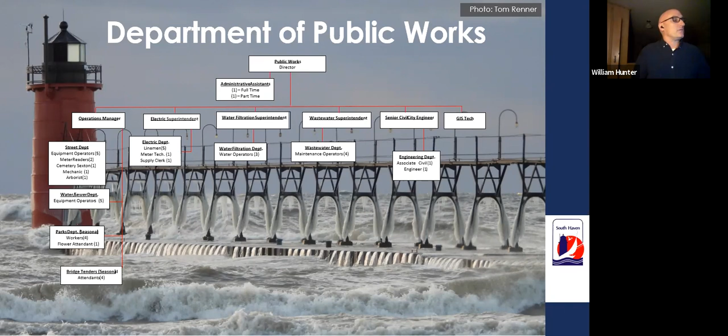Let's go on to the next slide. I'll start with the electric department. We have over 40 square miles of area that we cover and 8,500 customers. We have 150 miles of overhead electric lines and 10 miles of underground lines that we maintain. We have an operating budget of 19.5 million, and currently we're working with GRP, the engineer we've used ever since I've been here for any electrical line designs with the city.

We're currently asking them to start the design process for a new substation on 12th Street, so we'll have 3 substations in the future. That substation alone will cost about $5.5 million.

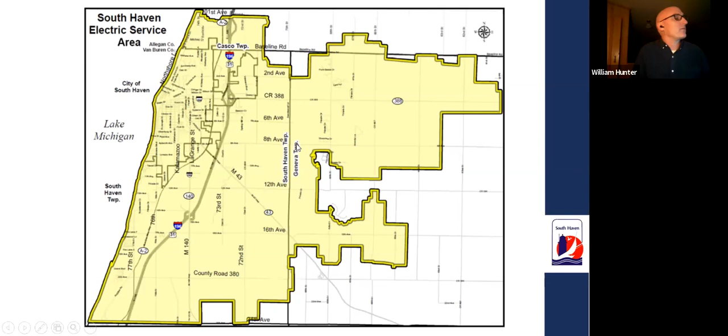This is actually our service area. It's quite large, with two townships in the city, so it's a large area that we cover.

It also shows pictures of upgrading a line on 77th and removal of old poles. We've been doing that in-house with the new supervisor, Joe Miller, taking over; he's been very proactive. You'll see dual poles during a lot of upgrades—they're still there, and we try to work with Frontier and Comcast to get those removed, but that's a challenge. So Joe sent staff out, and for any easy transfers we've just been removing them ourselves because it's been a challenge to get Frontier and Comcast to take care of those.

Another picture on the bottom shows hot stick cleaning and testing. All of our equipment—excavators, bucket trucks—all gets tested. Sometimes it's smaller stuff we test with the hot stick, but for the boom trucks we have companies come in and certify them.

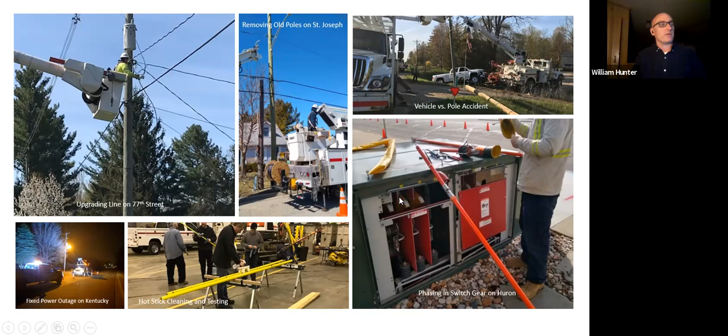We just switched over. Another one we have is GIS, Geographic Information System. It's a department, but there's one guy, Ryan Bosher. We are lucky to have Ryan Bosher as an employee in the city of South Haven. He's not just a guy that makes maps, which you can see right here.

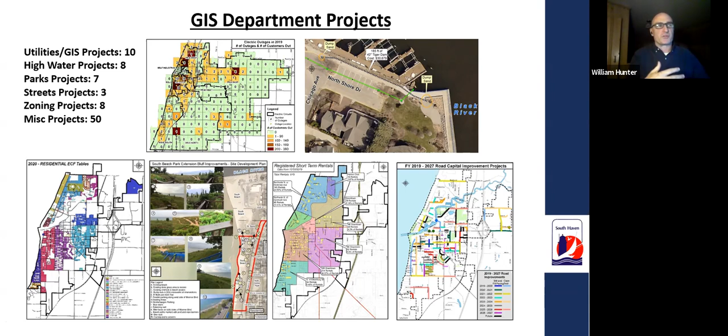You can see from the amount of maps he does, and this will show per quarter, but he also is very good in planning. He helps out in that. So I also call him our researcher. If you need something researched, Ryan's the guy.

So these are just some of the maps. A lot of them you've probably seen. You've been in a meeting before, if you've seen a map, Ryan's done it. A map says 1,000 words sometimes when you're trying to explain something in a memo, and then you put a map up and people go, ah, okay, that makes sense now.

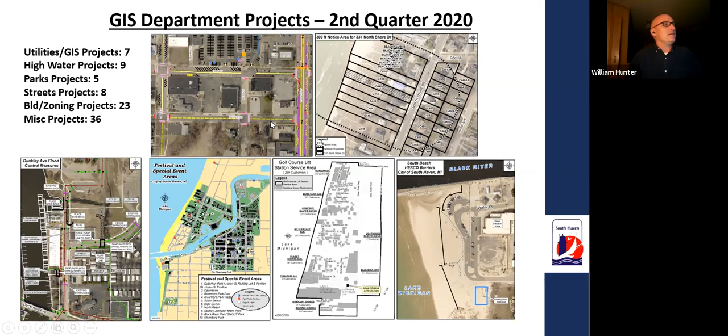Ryan does this. These are just some of the projects he worked on in the second quarter. I'm not going to go over every one of them, but street projects, planning and zoning, miscellaneous projects, parks, high water, to name a few, utilities, GIS projects.

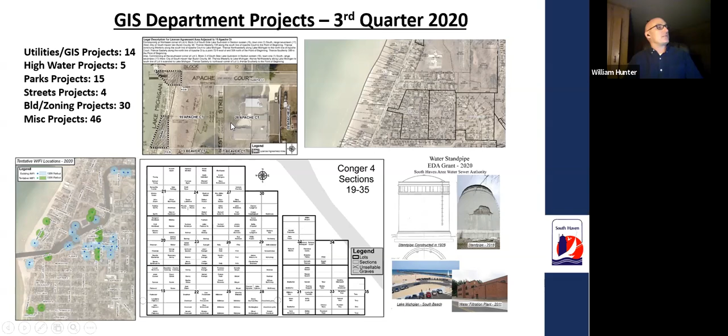Again, like I said, more maps. Send Ryan out to take pictures. He's the guy, for example, right over there in the lower right-hand corner that shows the concrete standpipe in its current condition. Plus over there in your lower left, you'll see the Wi-Fi, and then up to the top you'll see Apache Court. So again, these are all the projects he does.

He's done this too, for example: customers will come in and say I need a location on maybe my utilities or other information on their property. Ryan can print it out or find it. We have people come in and he helps them out. Like I said, he's a very good asset to the city. He's not just a map guy.

All that inventory is what Ryan can come up with in a matter of minutes. So when I put all this together, Ryan's able to pull it together and help out.

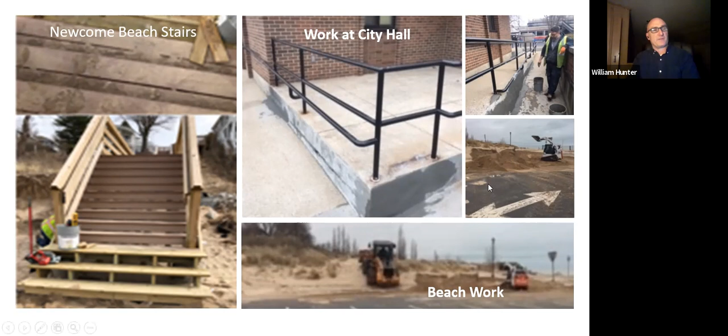Here are some pictures of some of the stuff the guys have done over the years. The staff worked on the Newcome Beach stairs, for example. When we moved those, we had to extend the steps on the bottom. For the handicap stairs up in front of City Hall, we had a blowout on the side, so staff went through and mudded the side of it just to preserve it and protect what we have existing there. This also shows staff cleaning the south beach on the bottom and the beach work they do.

These Bascule Bridges are expensive to maintain. Just the inspections alone, our last detailed inspection, which is done about every 5 years, cost $123,000. The biannual inspections outside of that run about $30,000. So it's an expensive bridge to maintain.

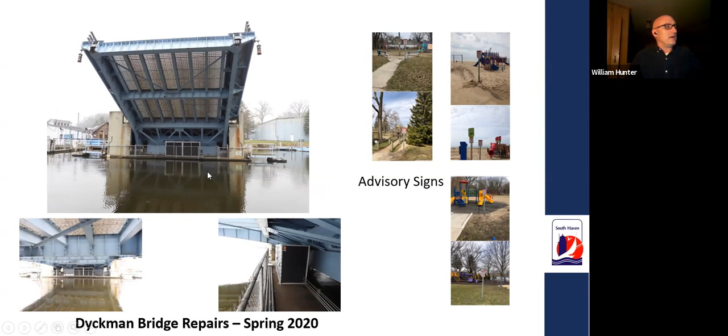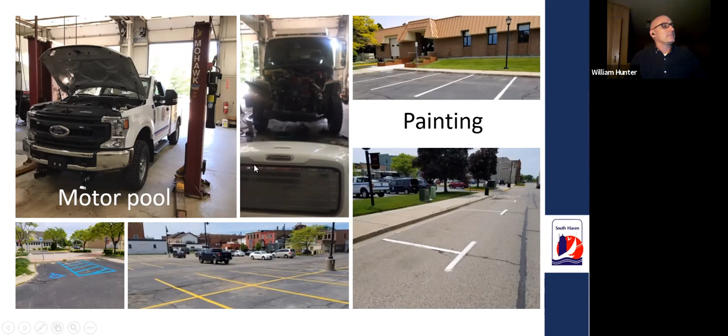Throughout the city, we're trying to concentrate in the future on not doing so much centerline marking. It might be something we look at in coming budgets—maybe contracting out the centerline and focusing more on our pedestrian crossings and parking lots, because due to not having enough manpower, those don't get the attention they deserve.

The two pictures to your right are the signs put up at the splash pad. We have our own sign shop. Prior to me getting here, we had to get our signs from a company and waited like 2-3 months to get them. With a machine we purchased for about $12,000, we're able to do our own vinyl signs in-house. We can have things plugged up or put out, and we can do them really quickly and within regulation—it's all in an MUTCD inventory of signs, so everything is put in according to the manual.

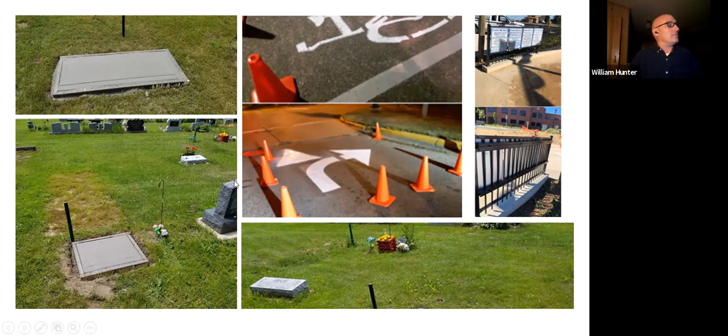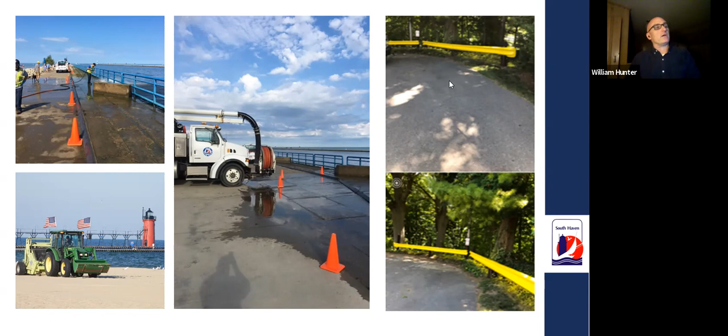This shows, to your lower left, beach cleaning. We're out there as soon as the beaches are open, at least 3 or 4 days a week just cleaning beaches. And then it shows a new guardrail that staff installed.

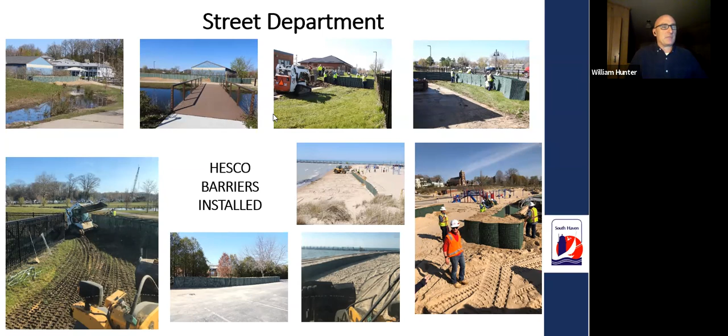I've received quite a few calls from other municipalities looking at this same thing, HESCO barriers—at least 2 or 3 calls a week asking how we did it, what the expense was, how easy it was, and people come and take pictures. So I think staff did a great job on that.

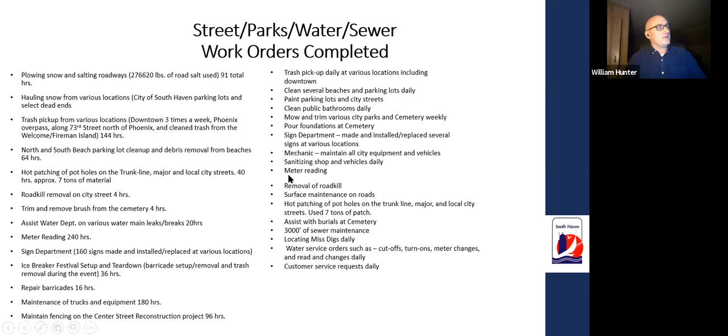Here are some of the work orders that staff has put together, just some of the stuff they've done. For example, you see 3,000 feet of sewer line jetted, and it shows the number of pounds of salt we lay each year. So, some of the work orders.

Over the next 20 years, we're going to be replacing $15.9 million worth of lead services that we'll have to budget for. Going back about 3 years now, the state of Michigan amended the Safe Drinking Water Act, and the definition of a lead service now is anything that has lead or was connected to lead. Galvanized services are now considered lead services, so we have to come up with a plan. That'll be about $15.9 million.

We have about $6.9 million over the next 7 years for the capital plan, just to replace the concrete standpipe. That services about 11,305 residential, business, and school customers. We have approximately $41 million over the next 28 years, according to our asset management plan, for work that needs to be done in our system.

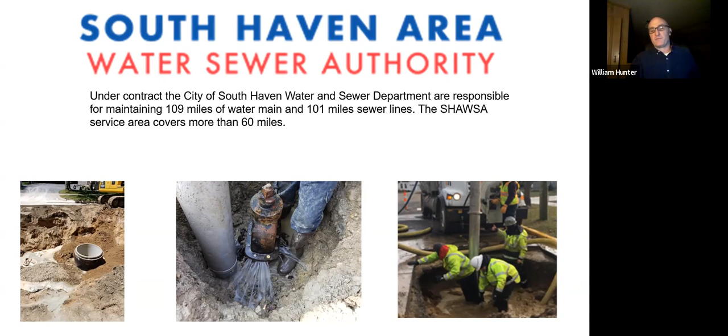We are going to be raising rates this year, unfortunately. Water rates will go up 6.5% effective January 1, 2021, and another 6.5% effective July 1, 2021. Sewer rates will go up 9.9% effective July 1, 2021, and 9% effective July 1, 2022. This is our service area for water and sewer.

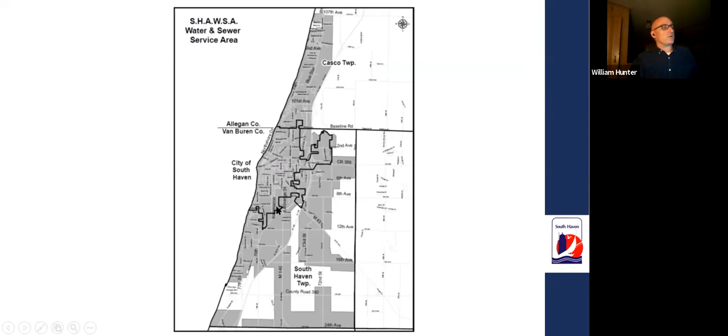You've got Casco to the north, South Haven Township, and the city. Just for example, that $15.9 million for lead service replacement is all within the city, because of course we've got the oldest section of distribution there.

Okay, moving on, we're now at the wastewater treatment plant. The value of that asset itself, with all the lift stations, is $23,316,468. That does not include the collection pipes themselves. Our current average at the wastewater plant is 1.39 million gallons, and our design capacity is 2.19 million.

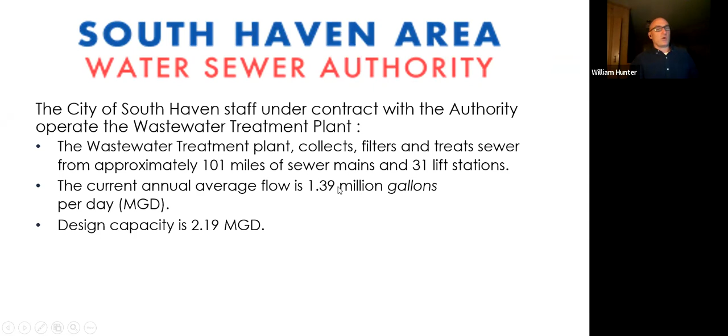Here's a picture of the wastewater plant, and on the side you see two pie graphs, and you'll see a couple more as we go. The wastewater treatment plant uses an asset management plan called Cartegraph, where we track everything, so we're able to dial down to exactly what we're spending money on. It's a great asset management plan that we implemented about 2 years ago, and it's been very helpful.

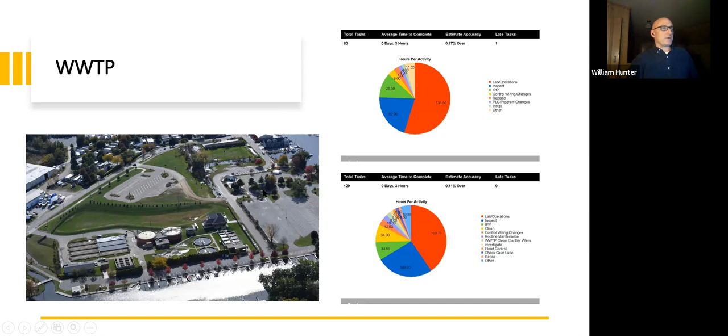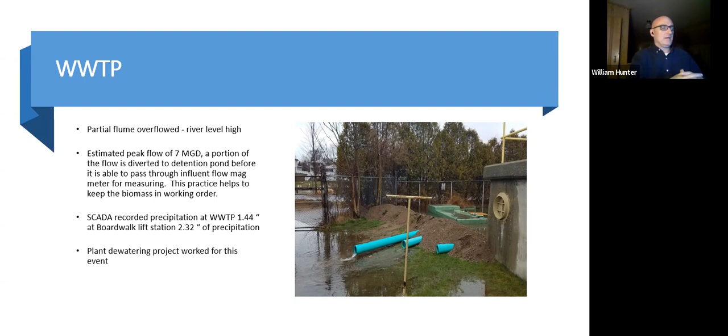This is what we've been experiencing. You can see that gravel berm over there, plus those pipes. We had to buy two pump systems because the water level was getting so high. The wastewater treatment plant is all gravity, so once everything comes to the grit building, it flows by gravity. If you have enough feet of head of water against the discharge pipe, it slows the system down. With the flooding and increased water elevation, we had to come up with a pump system—one to take care of the water in the area, and the other to discharge from the flume out. That's been working great. We're going to maintain these pipes as they are now, but we're looking at future quick-disconnect areas on the plant so the same pumps can just be hooked up when high water happens again.

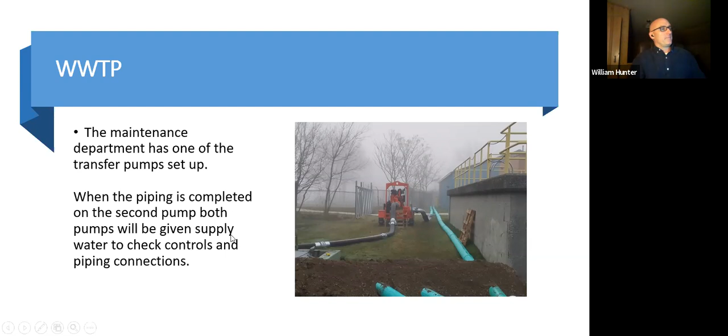Everybody's like, yay, but then you go to the wastewater plant and you've got the smell coming at you. A lot of times I can tell by the look on their face when I'm giving them a tour how long the tour is going to be, just by the first time they get in the building. So I know when I have to speed up the tour or slow it down.

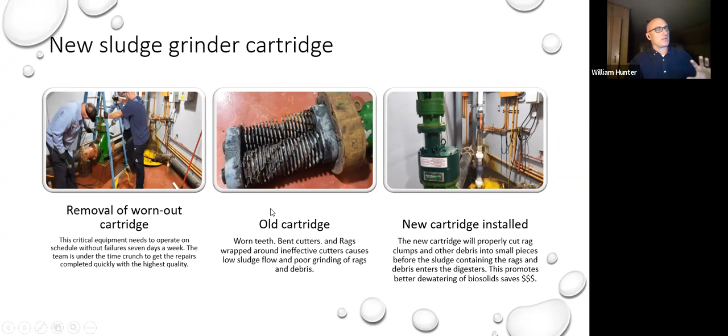This just goes to show some of the work, and all of it is done internally by staff. We might not rebuild the pumps entirely, but we can pull them, and sometimes we can actually do minor rebuilds. Sometimes you just can't get around it.

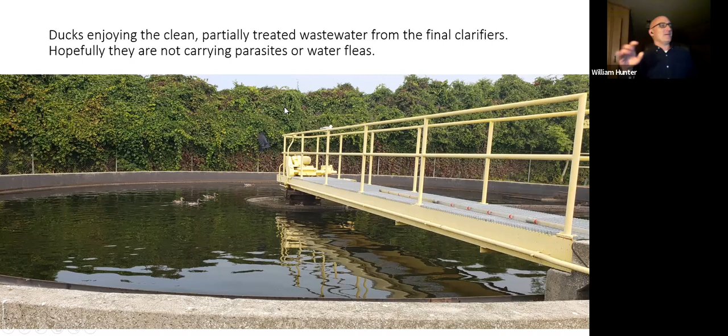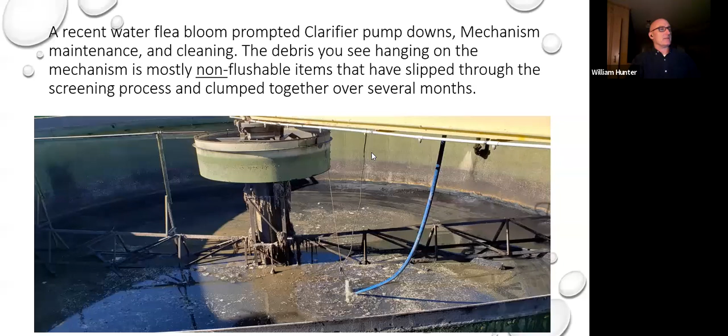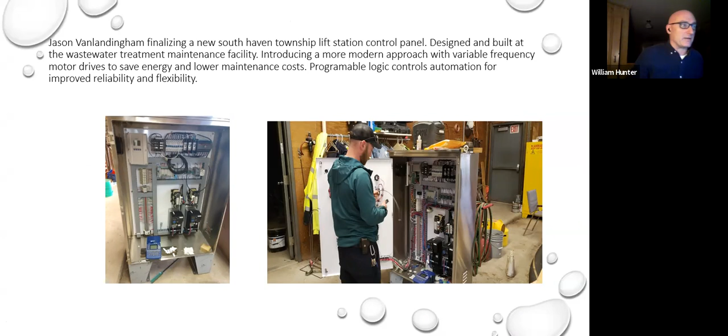This actually shows Jason, we have Jason Vanlandingham. He's a great asset to have on board. He's built quite a few of our controls on our lift stations and has done a lot of program PLC automation on them. So that's Jason actually doing some wiring right there.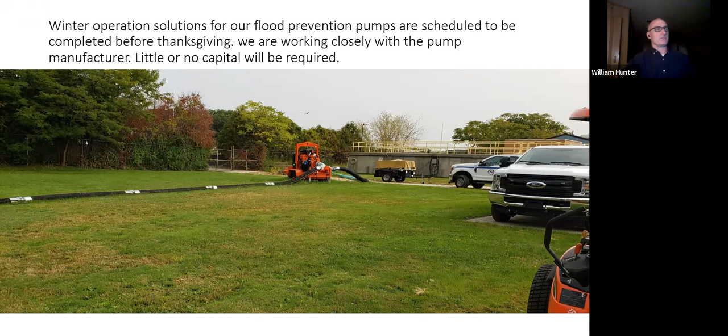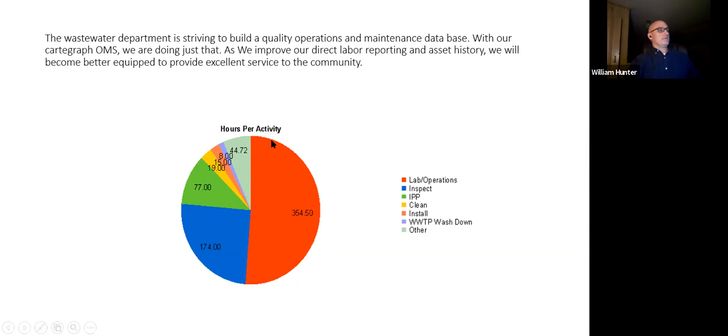So one of the things we have in our 28-year plan is to install a redundant intake, not only redundant but to increase our capacity. Think of it, right now that water plant only has one intake, so it's a vulnerability. We do get it inspected and televised, and Richie does a great job, but you don't drill through it, nor do you know the integrity of the pipe itself. So that's why you need to look at things like that, plus capacity.

Firm capacity of the plant, which is rated at the intake level, is 5.4 MGD. We service 11,305 customers within the Shawsa area.

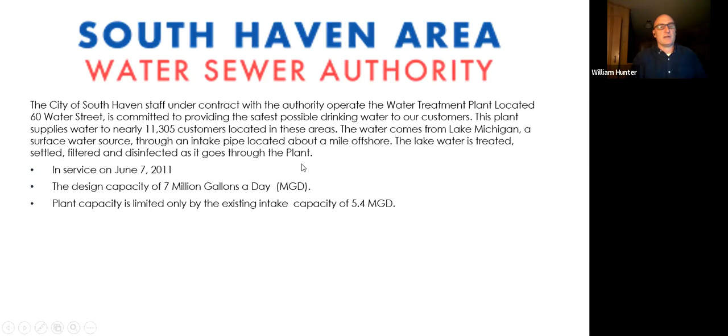We take these tests once a week. Richie sends a guy out and he takes all these samples. We run them back to the lab, and we do what's called the presence-absence test, where we take that sample and add a reagent to it, and if it changes color, then we know that there's coliform in there. Then we'll take it to another step where we plant it in brilliant green, then we plant it back in lauryl tryptose.

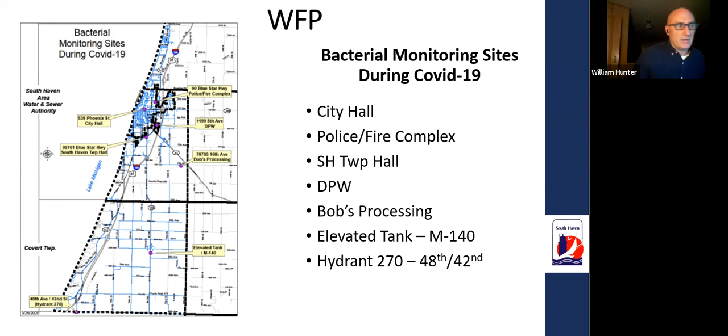We also do heterotrophic plate counts here, and some of these other sites we actually use for some of our other monthly or quarterly samples for haloacetic acids and trihalomethanes.

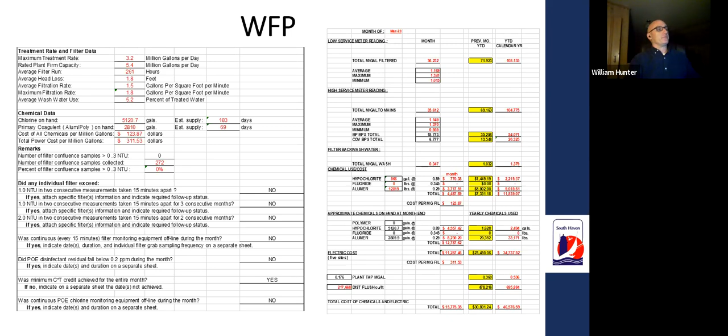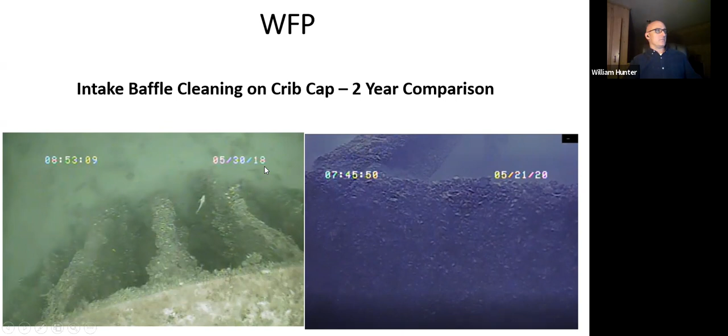Plus, and I probably had said this before to City Council, it takes a road that's a PASER rating of a 5 and brings it back up to a 7 or an 8. So we're taking that curve and extending it out.

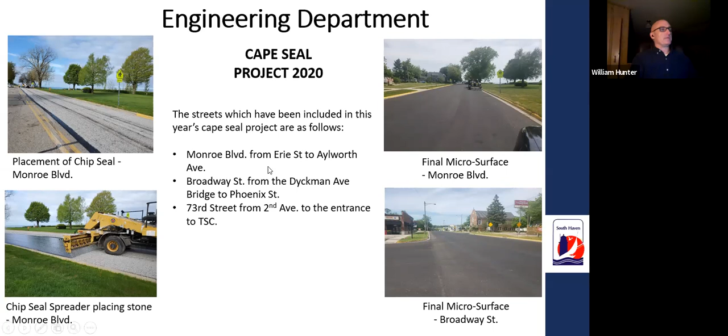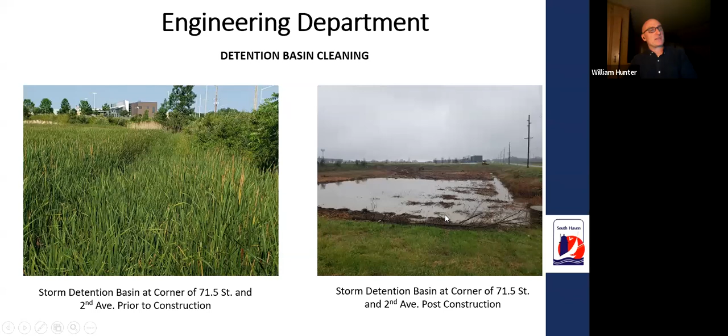Detention ponds - we had a detention pond over at the industrial area that we cleaned, which had never been cleaned before. You can see the before, with all the vegetation, the Phragmites. Then the other side, we had that all treated and cleaned out, so we brought it back to capacity. We had some other ditches too that run just to the south. Spencer Manufacturing hooks onto one, and a couple other companies in that area, but we had to clean those out and bring them back to the original capacity, plus at the DPW building as well.

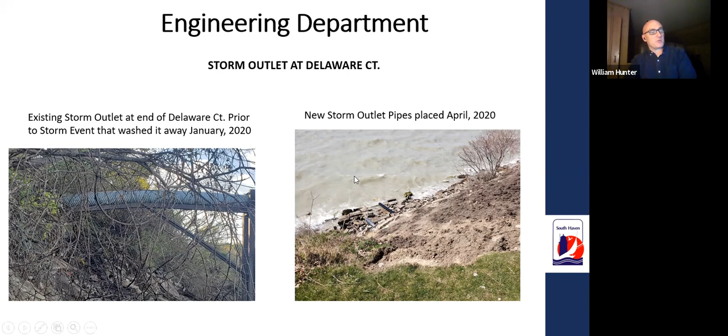Here actually shows the storm outlet replacement at Delaware Court. This was a $74,505 project. You see the before and the after. We may have others pop up due to the high water, but this is the one that did at the time.

Indiana street sidewalk repair - the next couple of slides will just be going over some of the sidewalks we've done. We budget each year $200,000. We take about 100,000 out of 101,446, and another 100,000 out of the street fund, and we do sidewalk work.

This was one that we did in Indiana. Looks like we replaced 286 linear feet at $40,000.

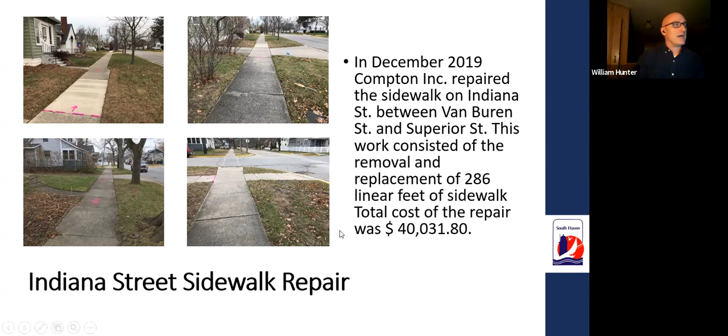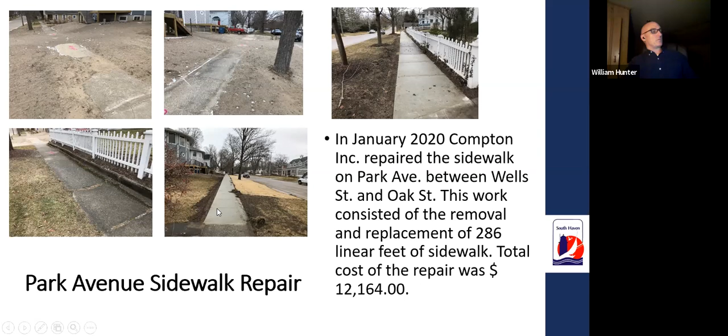And here's another one on Park Avenue, 286 feet at about $12,164. You can see that before, that's what we were dealing with, that upper right - you can see those sidewalk sections just missing. And then when we're done, that's what we have.

Another one over by the washout we had over by the river, in addition to Superior and Water Street. So we have, looks like approximately 20,000 spent on that, $20,908.

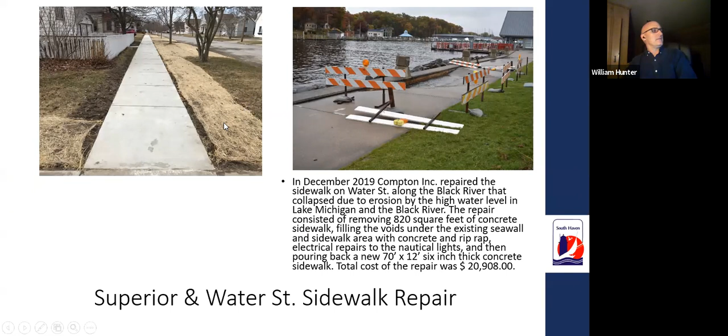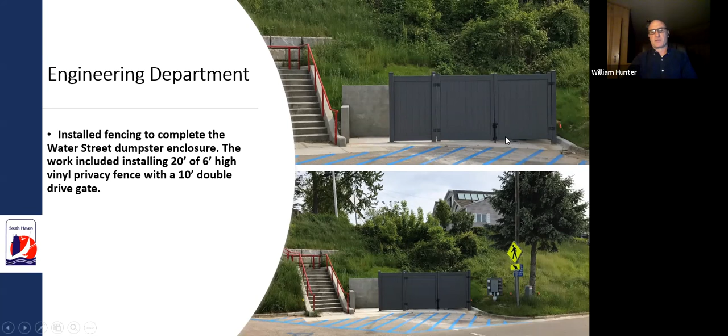Here we finally closed out the Center Street project. We did have some concrete work that they did just recently - some valve boxes that weren't quite right, that were just on the punch list, so no cost to us.

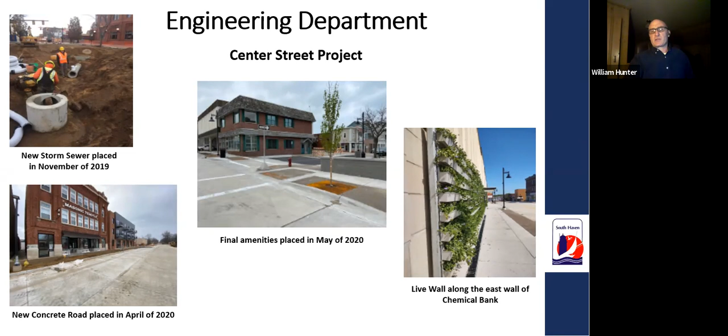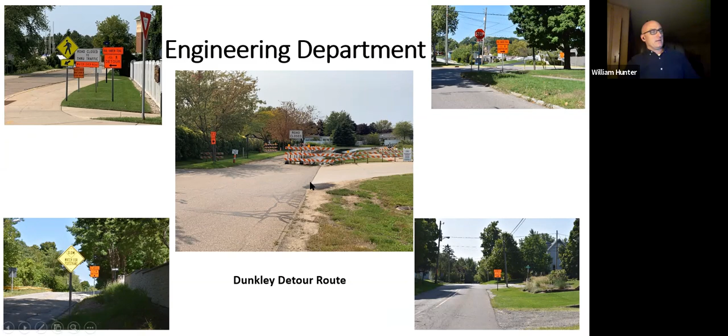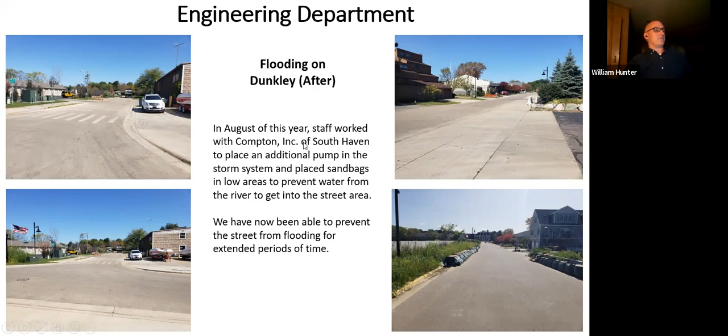Flooding in Dunkley, that was ongoing again. We finally had Mike Dopp actually coming up with a great plan, we call it option 5, where he's able to get that water cleared up now, and that came up to about 54,000. That's with the Tiger Dam system and the other easements we had to get on private property. And here's after everything's cleared up. That shows some of the damming we had to do, but overall it's been pretty good. We've had a couple of times where it came up, and that was due to pumps being clogged, but overall it's been working out very well.

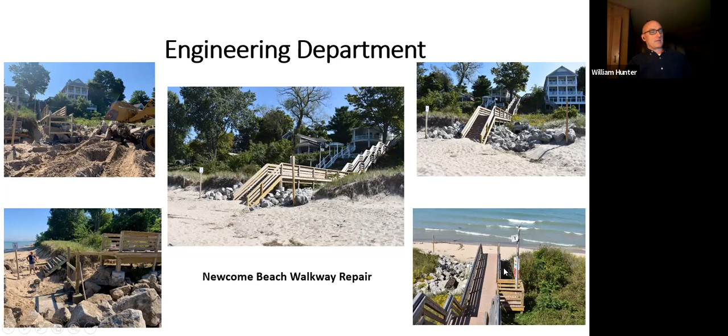Newcome Beach, there's the extent - we had to actually shorten that back, and Compton's did a great job, jumped in and got it back to where it originally was.

This is the small craft project. We had, through a grant that we were awarded through the Michigan Coastal Zone Management, received actually a $35,000 grant. Total project was $80,000, so the city's balance in local funds was $45,233. Shows some of the pictures and the finished product.

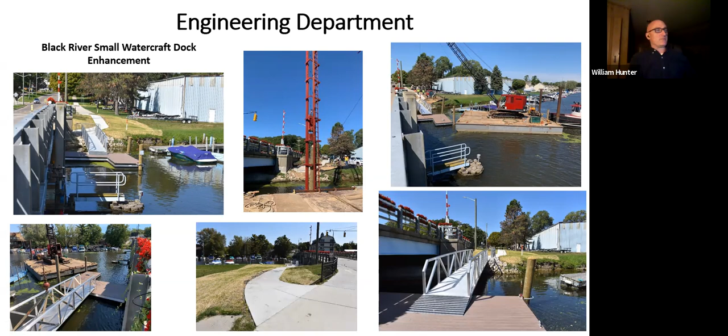It was very challenging because the gas line actually goes across right there, and the gas company wouldn't tell us exactly where it was at. They gave us point A to point B, but they wouldn't tell us if it went one way or the other, and that created quite a bit of a challenge trying to put the pilings in.

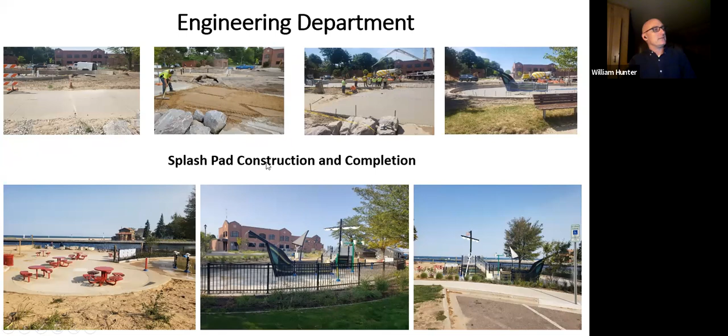Here's the splash pad. This project was 612,000 with a grant of 300. I think it's been very popular. Seen a lot of kids there.

So some of the other projects that we do is some other miscellaneous sidewalk work, water main repairs. So the engineering department, they'll get stuff handed over. For example, like a water main breaks here, so they'll go out and try to get contractors to patch it up, restore it, and then also sidewalk work as well.

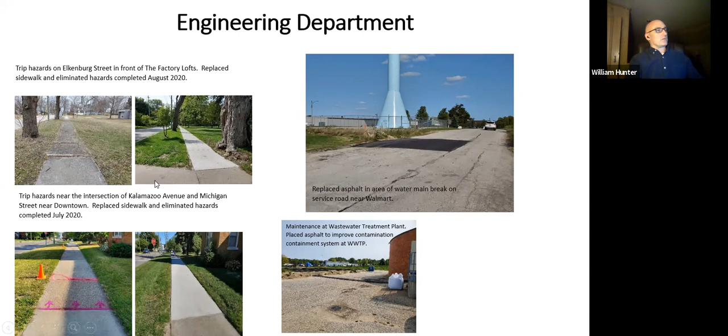Some of the other things we're working on, we're doing a lot more with RoadSoft. It's an asset management plan program that's free from the state. We're taking information like all of our PASER ratings, putting them in there, and that's helping us plan better about when these roads will approximately fail. So every year, if we're PASER rating this one road and it keeps coming in at a 5, but another road right beside it goes from a 5 to a 6, we know the curve's going to be different, and that allows us to plan: this road here can wait a little bit, but this road needs to move forward.

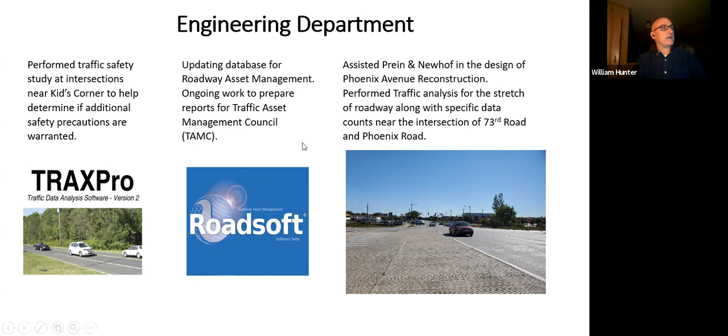And that's all I have for City Council. Does City Council have any questions on the end of the year report?

I'll jump in first. Thanks, Bill. Very thorough, good stuff. Hopefully that, as council's aware, taxpayers are aware, this is obviously where the money's going. I know we're going to have some tough discussions coming up about rates. I know we're working on another report that just shows folks our assets, what they look like, a snapshot of what they are, what their useful life is. I think it's important for everyone to understand, just like your house, our taxpayers are our stakeholders, and these are their assets. So it's important for everybody to understand what it is we own, what it is we need to maintain. And ultimately, guess what folks, that's what government's about. It's not always the most exciting stuff, but we like our lights to turn on, our toilets to flush, and our water to flow. So that's government. So thanks, Bill, for your department's amazing work.

I will say that you mentioned several names, I will ditto all of them. My lights continue to turn on every single day, and I'm amazed. So any other council questions for Bill?

Mr. Schlack, Stephen. Yeah, I was wondering about all the maps that Ryan makes. Are those available online at the city's website, or can they be? We've never done that before, Steve. A lot of those maps are still actually, if they were ever in an agenda, they're still there.